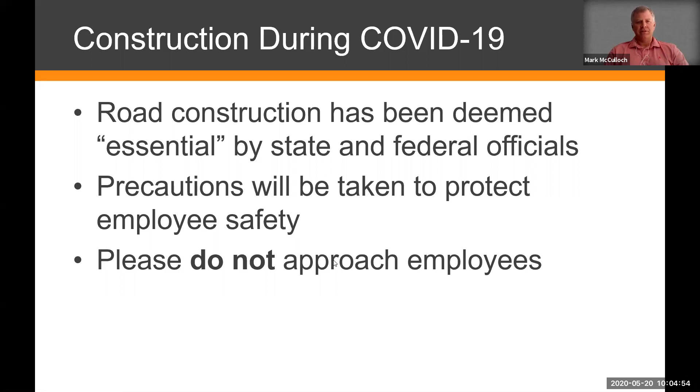Next slide, please, Emily. All right, let's give a little bit of background here. Some of you that have been in the area for a while know this too well. Once upon a time in 2013, I was presenting at the Salem Township Hall to present a roundabout to the group. And as some of you may recall, that roundabout was a little bit larger than the one that we're going to be building this summer.

That larger roundabout created constraints on property owners. We were at the point where we needed land to build the footprint of the roundabout. And being sensitive to the country store at the northeast corner there, we were utilizing a footprint that was more or less taken on the west side as far as land needs.

But we ran into some difficulties with the property owner when it came to purchasing the right of way, and ultimately the budget just was not there to be able to come to terms to purchase that right of way. So ultimately what we ended up doing was returning the grant money that was given to us at that time, because it just was not budgeted and we were too far apart on a number, and the project had to be shelved.

Well, since that time, the Washtenaw County Road Commission has been involved in developing a new kind of roundabout, and we didn't invent it, but we're definitely embracing it. It's called a mini or smaller type roundabout, where the footprint is not as big as the traditional roundabouts that once upon a time we built, but at the same time, it still offers the capacity and the safety benefits of the larger ones.

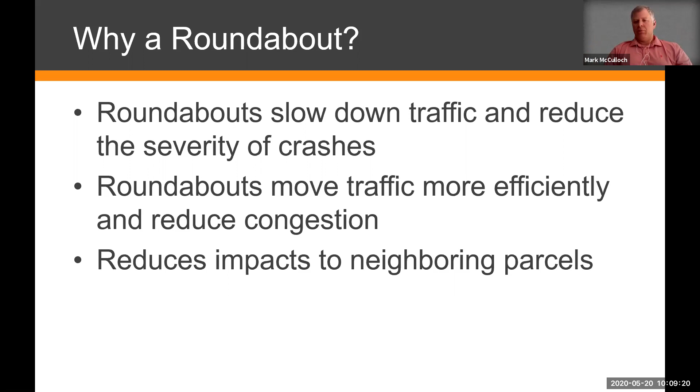Benefits, like we were talking about, the safety component of it because of the low speeds that occur, and also because they're not at 90-degree angles when you're colliding with one another, if and when that does happen. We talked about the congestion mitigation. Another benefit is that we're just going to get new pavement out there. So that's always a plus.

That's been, frankly, a demand from the public to our politicians: fix the roads. Hence why Whitmer had that slogan. But it's one of those things that's going to be fulfilled as part of this project. Next slide, Emily, please.

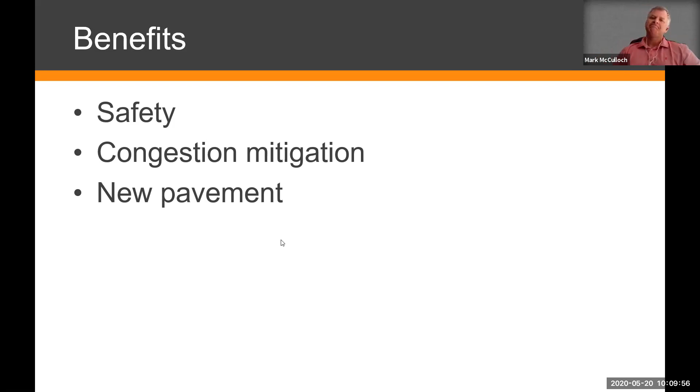All right, so let's do a little bit of a deep dive here on the project overview. So currently right now, if you're driving through that intersection, you'll see a contractor here, a contractor there. Those are working on the utilities. So Detroit Edison, Consumers Energy for gas. You have Charter Communications for cable out there, and AT&T. Those are the four primary players at that intersection.

So they had some issues with conflicts that we were going to have with our infrastructure that we're going to be putting in that intersection this summer. So in order to balance all that out, they're out there currently moving their assets, infrastructure around so that we'll no longer be in conflict.

So starting in June, so a matter of weeks now, we will be installing a single lane, one lane roundabout. It'll construct curb and gutter around the circumference of the islands, at both the splitter islands, the center island, and around the intersection itself. At the proximity of the intersection, we'll have storm sewer, but we'll also be using ditching as we get further out away from the intersection itself.

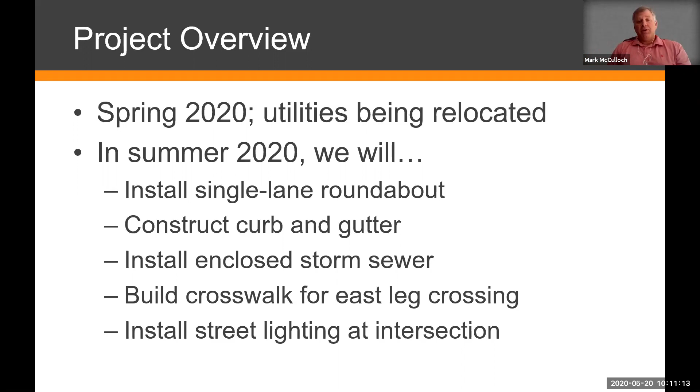There will be a crosswalk built on the east leg of the intersection as requested by a couple of the property owners there. And we will be installing street lighting at the intersection. Next slide, please, Emily.

And we've got quite a few of these on the south side of Washtenaw County that have demonstrated to work really well and be very efficient. Next slide, please, Emily. Okay, so I'll give you a few visuals here of what's going to happen along the way. So what you're seeing here, it's a term called pulverizing, crushing, and shaping.

So getting rid of the existing pavement out there is an expense. We've got to take time to pick it up, put it in a truck, haul it away, and take it probably to a landfill. Well, that's an expense that's incurred. So instead of doing that, in a rural environment such as 7 Mile and Pontiac Trail, we can use this as really good base material.

So we crush it. Think of it as a giant garden rototiller just used for roads. And it pulverizes that pavement into what looks like dirt, frankly. When we use that as base material, we shape it. Next slide, please, Emily.

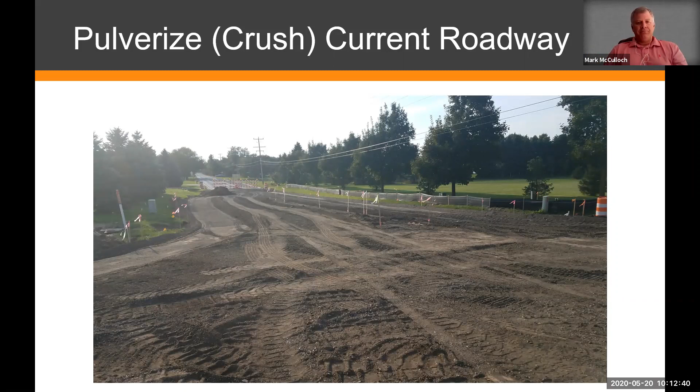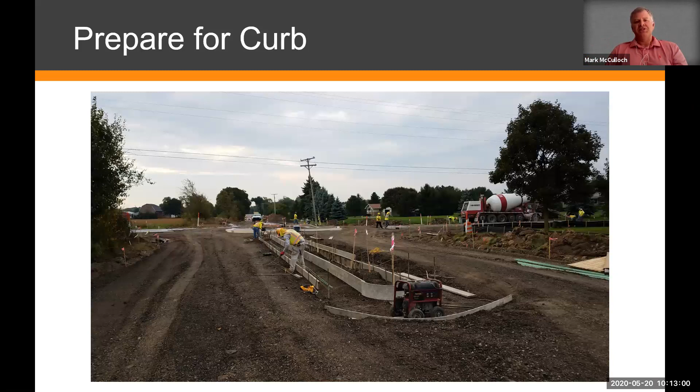So what we do is we shape it, we get a nice crown in the road, and then it's prepared enough to put storm sewer in and place curb and gutter, as what you're seeing here. So these are forms that are going to be placed likewise at Pontiac Trail and 7 Mile in order to place curb and gutter. This is an approach. This is a splitter island that you would be seeing as you approach the roundabout itself. Next slide, Emily, please. And then here's the after product, after it's been poured.

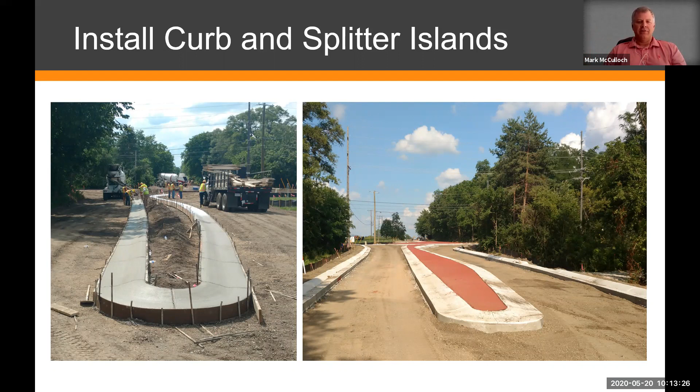And here's a picture of the center island. This one here is at Salem Church and Wagner, so it's a little bit bigger. Ours will be a little bit smaller, but nonetheless, they're comparable. Next, back up, Emily. Important point. So you notice on this slide here that it's mostly flat, okay? It is going to be raised 3 to 4 inches.

Reason for that is it allows trucks and farm equipment to be able to turn directly left at the intersection. Because the footprint of the roundabout itself is tighter, it does provide a few constraints to the big trucks, the 18-wheelers as we like to call them, or the combines that are out and about in the fall at harvest time. So this design feature allows those maneuvers to be able to go left around it.

School buses, for the most part, won't need to use it. Garbage trucks will not need to use it. And for sure, the F-150s and the sedans, they'll just be able to drive all around it because you'll see a visual cue that it's going to be 3 to 4 inches higher. So you'll circulate counterclockwise around the center island. Next slide, please, Emily.

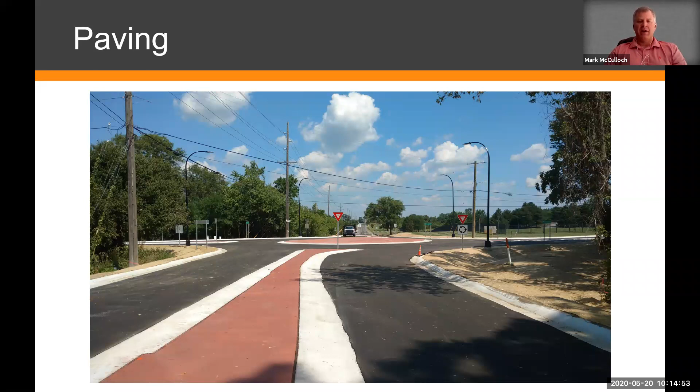And this is near completion of Salem Church and Wagner. As you're approaching the roundabout, you can see the center island, the yield signs in place, as it will look somewhat like this once Pontiac Trail and 7 Mile is completed. Next slide, please, Emily. And then here's an aerial view from drone footage of what it would look like, minus 4 crosswalks out there. We just have one crosswalk on the east leg.

So traffic, when you come up to the roundabout there, you would yield to traffic already in the roundabout to your left. Once there's a safe gap, you enter and you make your maneuver, whether it be left, right, or through, to go northbound, southbound, eastbound, westbound, depending on what leg of the intersection you're at. Next slide, please, Emily.

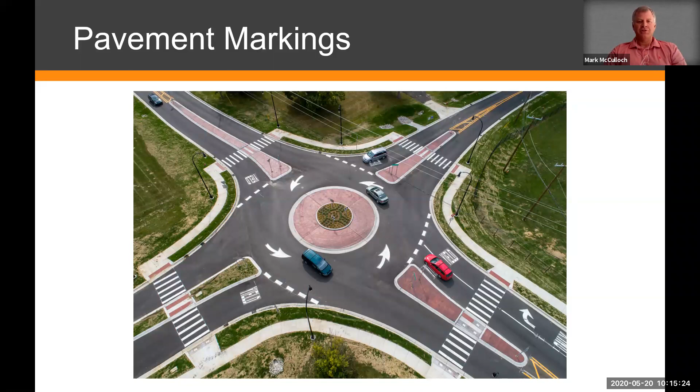All right, so timelines. We're going to start in June. Now, it's a little bit vague right now. The contract that we had in place was to start June 15th. The contractor, Cadillac Asphalt, has asked that he start earlier, and we found no reason to say no. He is attempting to finalize his schedule with his subcontractors to be able to start as soon as June 1st, because the utilities have all informed us they will be out of the way at that point.

So that's good news, because it'll just mean that we're opening the intersection sooner as opposed to later, potentially, should we run into bad weather like we did last year. So with that, Emily is going to be communicating to the public as far as when we'll exactly start, so stay tuned for that date. Plan is to be completed in the middle of August. If we start sooner, I project that will be moved up to the beginning of August.

Contractors will work Monday through Saturday, 7 a.m. to 7 p.m. Probably less than that, meaning on the tail end, they'll probably wrap things up at 5, but you never know. Sometimes they do work to that point. Next slide, Emily. So impacts to traffic.

So except for access to the corner general store, the intersection will be closed to all traffic for approximately 8 weeks. So what does that mean? It means that if you live in South Lyon and you want to head southbound into Ann Arbor to get to work, you're not going to be able to get through that intersection. We're working out the details with the contractor.

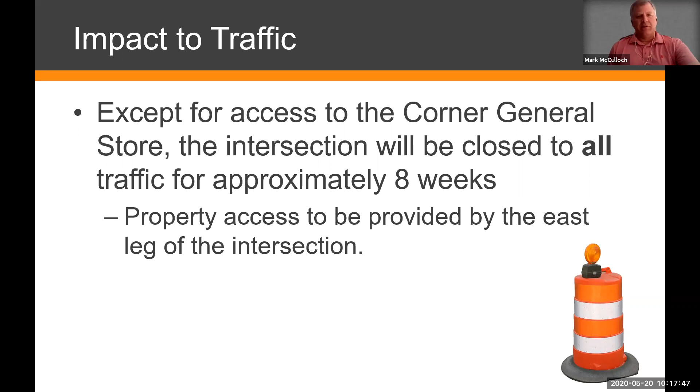All right, next slide, please, Emily. So here's a general scope of the detour, the posted routes that are going to be provided. If you're coming from 7 Mile Road, you're going to have to use a detour route that's going to consist of, let me get my bearings here, Dixboro, 6 Mile Road, and Angle Road in order to get back to 7 Mile Road. And likewise, if you're heading north and south on Pontiac Trail, you're going to utilize a detour route that's 6 Mile, Dixboro, and 8 Mile Road.

So the question that often comes up is, do I absolutely have to follow this route? Well, we post detour routes and try to utilize pavement as much as possible for the commercial traffic. So the answer is no, you can take any route you want, but we have to choose one, and these are the ones we typically choose. So those will be the posted detour routes given to the public. You'll see signs posted along the way to guide people to their intended destinations. Next slide, please, Emily.

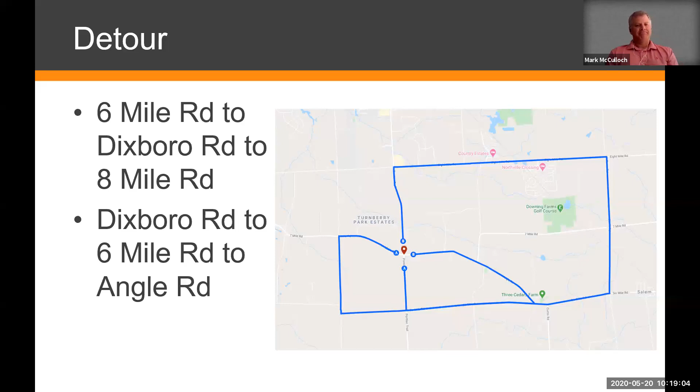All right, construction details. For people that live within the project limits, your mail will be delivered. We will work with the mail service to figure that out. For trash pickup, you would typically put your trash out to the front of your yard. And then what we tell the contractor to do is take that trash and move it outside the project limits, and at the end of the day, take the containers back to the person's front yard so they can take them to wherever they store them for the rest of the week.

Interaction as a pedestrian is also something that's sometimes tricky. We ask that you minimize that as much as possible. In fact, don't do it at all, for your own safety, if possible. But if there are special circumstances that need to be worked out, you can always contact me and we can try to find a solution.

At the end of the project, you'll notice that your yard potentially is brown because of the topsoil in front of it. We do restore those yards back to a condition where grass can be grown. That is a condition in the contract placed upon the contractor. So it will take some time for that yard to be reestablished. After the project has been completed, we will keep a visual eye on your yards to make sure the contractor is completing their work as necessary so grass grows. Next slide, please, Emily.

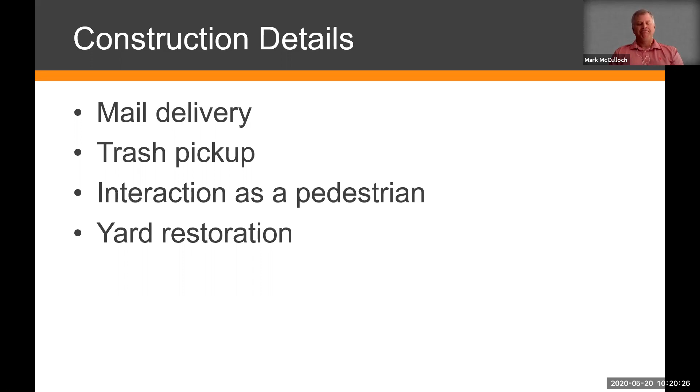So as far as a reminder, when the roundabout does open to traffic, it's important that you slow down on each approach, that you look to your left as traffic is going counterclockwise within the roundabout. When no traffic is present, proceed slowly through the intersection. But when traffic is present, you yield. And that just means you wait your turn. When there's a safe gap that's present at the intersection, then enter the roundabout and continue your maneuver.

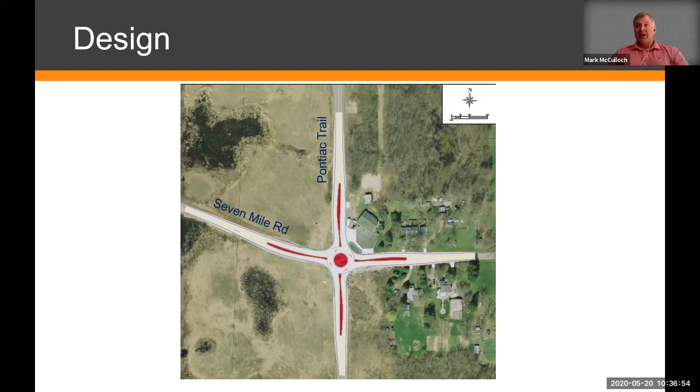So what we try to do is understanding that this will be a change to people that live within the project limits. What can we do to help minimize any type of spillover onto their property? So we've worked with Detroit Edison to get a special type of lamp to do just that. And if you were to drive some of our roundabouts, for instance, at Ann Arbor-Saline and Textile Road, Salem Church and Wagner Road, you'll see the same similar type of lamp post that's going to be provided for this job.

Okay, thank you for the question. Anybody else want to virtually raise their hand and ask Mark a question, or any other questions in chat? We do have a comment from Jill with some more information about Salem Farms Estates, and they appreciate us looking into this and working with the Sheriff's Department if there is aggressive cut through traffic. Sure. As Mark said, it is a little tricky because they are public roads, and so we can't close them because the tickets for violating that closure would not be able to be enforced. But Salem Farms Estates is off 7 Mile east of Pontiac Trail. So Jill, we will certainly look into that and monitor that throughout construction. Writing that down. Okay. I don't see any other raised hands.